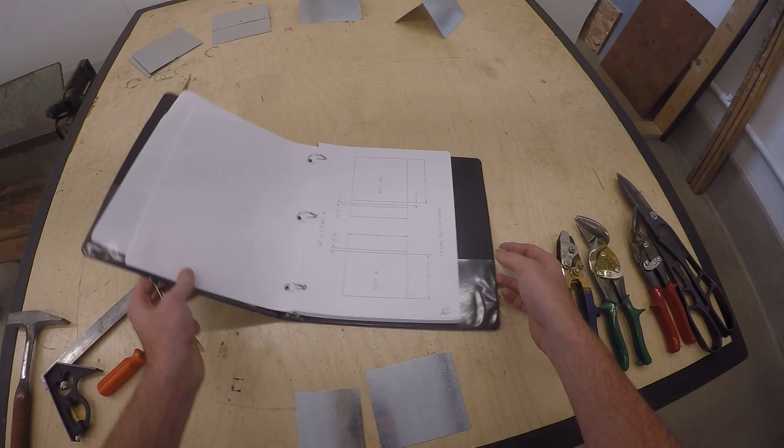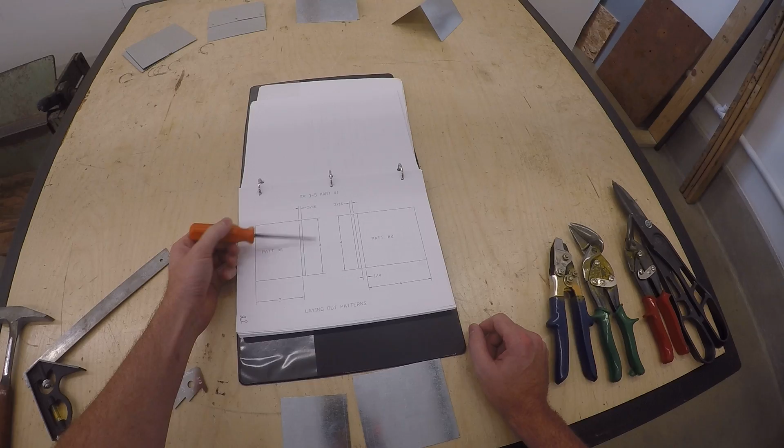So on the next page of the project, what you're going to see is we've got 2 parts given on the plans. We need them to measure 3 3/16 by 4 inches in height for part 1. Part 2 needs to measure 4 plus the quarter plus the 3/16, which is 4 7/16 by 4 inches tall on that particular part.

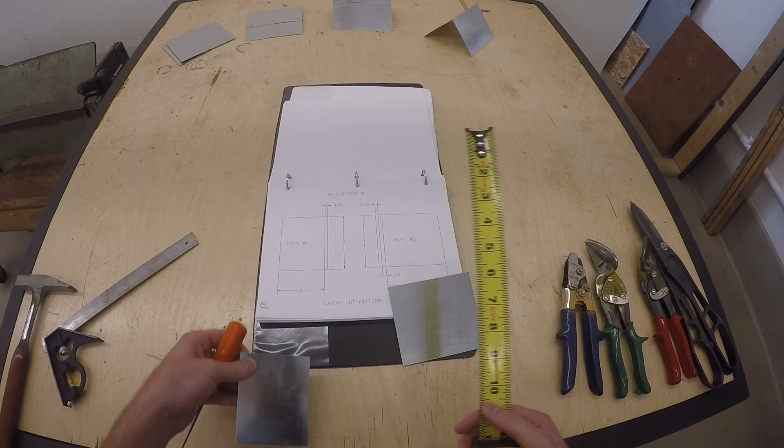So I've cut them already. Right here I've got them, and they should measure just fine - 3 3/16 by 4 inches tall, and then the second part, 4 7/16 by 4 inches tall as well.

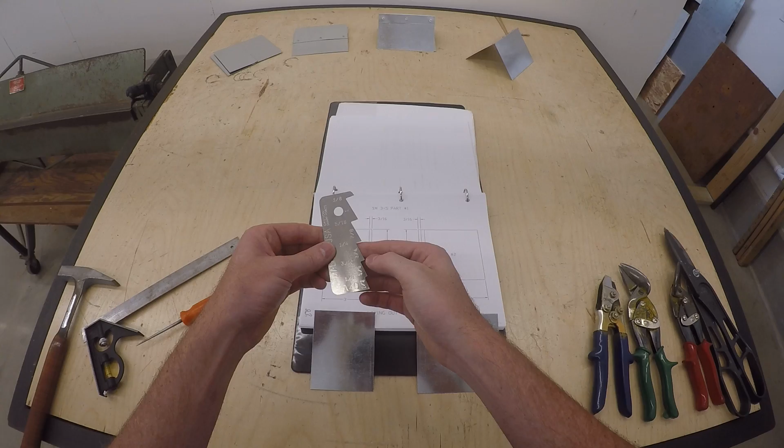So the first thing I did next was lay out this 3/16 mark on the edge of the part. This particular scribe does have a 3/16 marking on that second indentation, so I took it on the edge of the table and scribed that particular mark, and that was all we had to do for this particular piece. The second one we had to do a little more work.

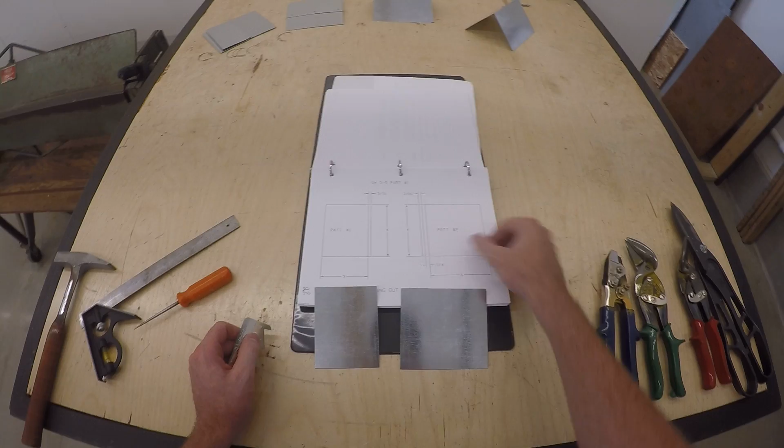Obviously it needed a 3/16 marking first, so same deal with the scribe, the 3/16 setup, and we scribed that. Then we followed it by the quarter inch. That's 3/16 plus the quarter gives us 7/16 inch dimensions, but the scribe doesn't have any of that. So I used the combination square, set it up as 7/16, and marked that right on the edge there utilizing the scribe, or some people will just drag the square down it, but that's up to you.

Now that I have these 2 particular parts made and drawn with my dimension marks on them, let's go on to the next page and look at our forming views here.

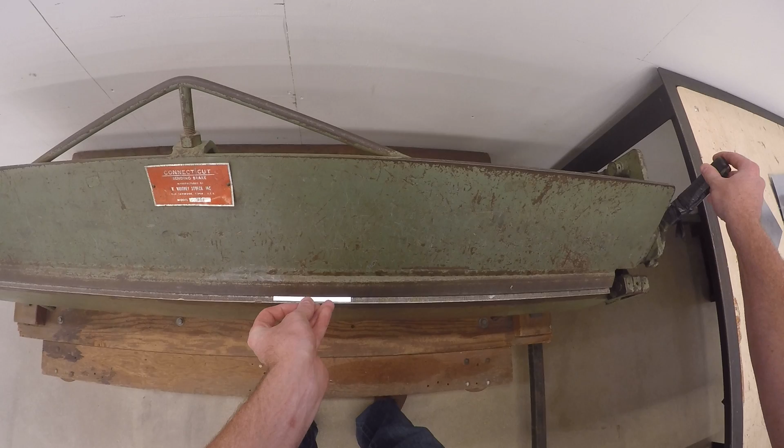So right on my mark there, we'll set the 3/16 up where it belongs. Maybe that's a little bit long yet - taking the time to really make sure everything was lined up just perfectly. You can measure your 3/16 with the tape measure as well, like we've done in the past.

And we're going to pull that up to a 90, just like that. Okay, now that we have that particular part made, we're going to set that aside. That'll be complete. Then we're going to look at part number 2, and take our 3/16 and bend that all the way over.

But we're not going to close that down - we're going to leave a small gap inside of that piece. So in order to make that formation and fabricate that connection, we're again going to set it in there at the 3/16 mark, making sure everything's squared up and true with the edge of the apron there.

Again, you can measure it if you need to - 3/16 on both edges there. And this time, rather than stopping at the 90, we're going to pull that all the way up until it stops against the apron of the brake there.

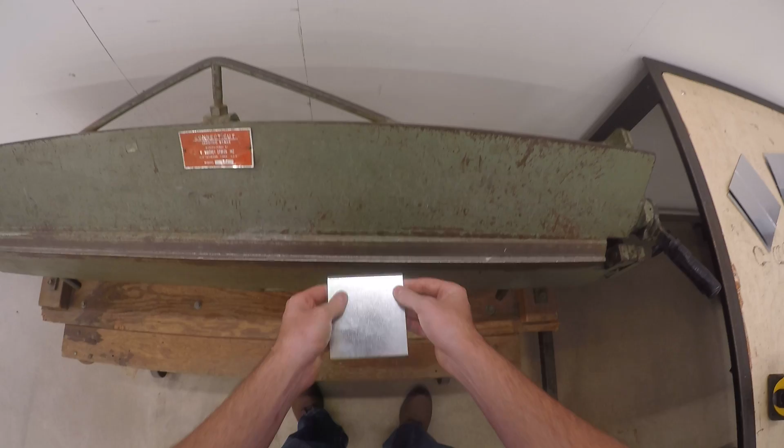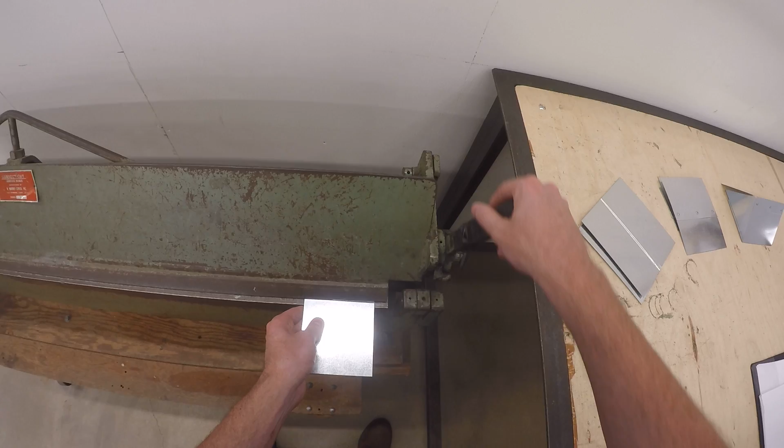At which point we've got a part that looks something like this, but we do need to bring that down just a little bit tighter. So at this point in time, we're going to slip it on the outside edge there. I don't know if you can see the handle - maybe if I move over here on the edge, you'll be able to see the handle in the view there, and see that I don't necessarily close it all the way, but I bring that closer.

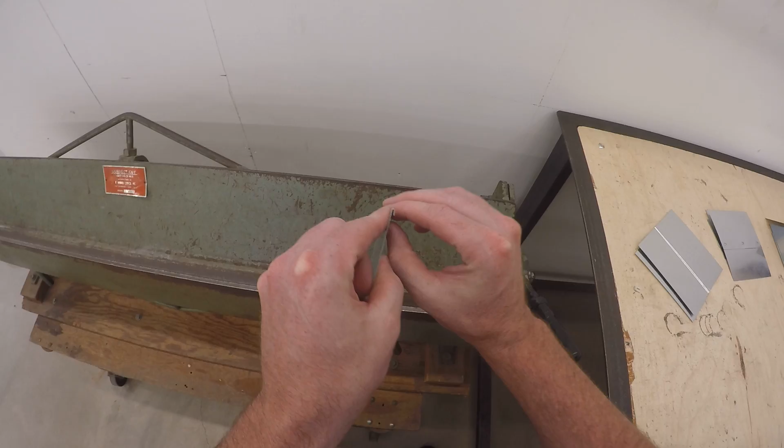This would be all the way closed, and I stopped about here with that apron. Now it's got this little edge there where that other piece of metal will be able to fit into. So looking back at our pattern, you see that it matches with that little lip on that second part.

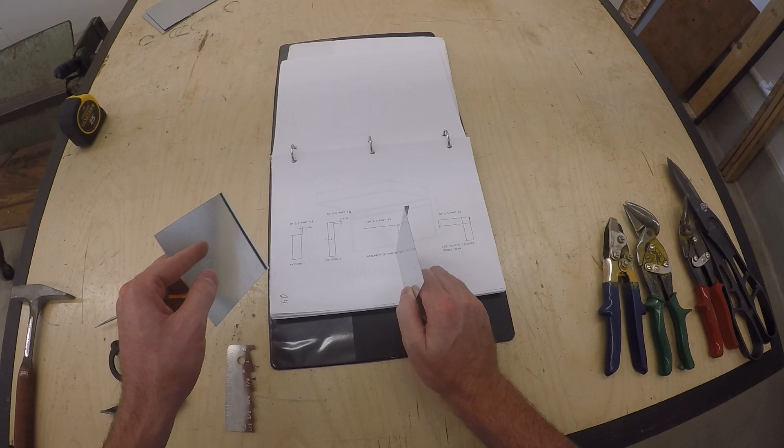So if we go to the third assembly diagram, or the third fabrication view, it's the assembly of part 1 as well as part 2. We're going to take the first part, which is sitting like this over here, and carry that over to the bottom. Then we take the second part like this, turn it, and hook that lip that we previously fabricated.

At this point, the edges of the piece should line up just fine, but they're not tight. So before I move on to the third view, we're going to put the part in there, hold it up against the edge, and tighten that seam up with the apron brake. It can be a little challenging to do.

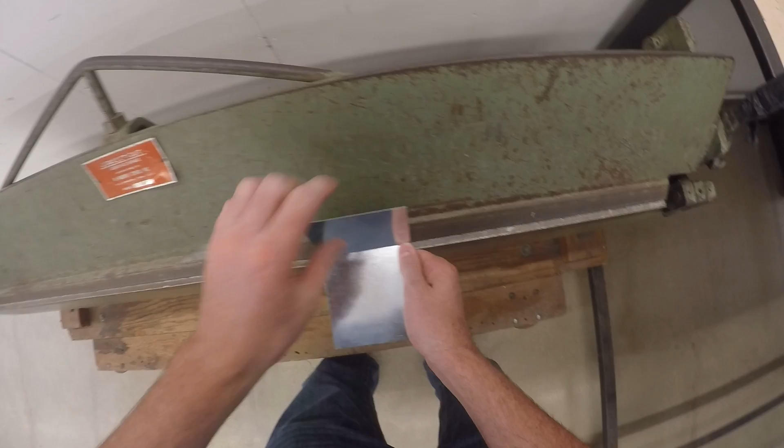We're going to slip it in there, make sure everything is taut. This piece pushed up as far as it possibly can be against the brake, as well as lined up this direction. And we're going to close that seam all the way now using that handle over here.

At this point in time, it is still slightly loose, but it's considerably tighter than it has been in previous attempts. Sometimes you have to go to the center of the apron or different parts of the brake that are tighter and finish them.

Okay, at this point in time, we've got that portion of the part completed. Now what it says to do is take this edge in the brake, and we're going to fold that up till it hits a 90 degree to complete this particular edge, and we should finish with a 3-inch piece here and a 4-inch piece here, and then 4 inches tall. So let's show you how to do that.

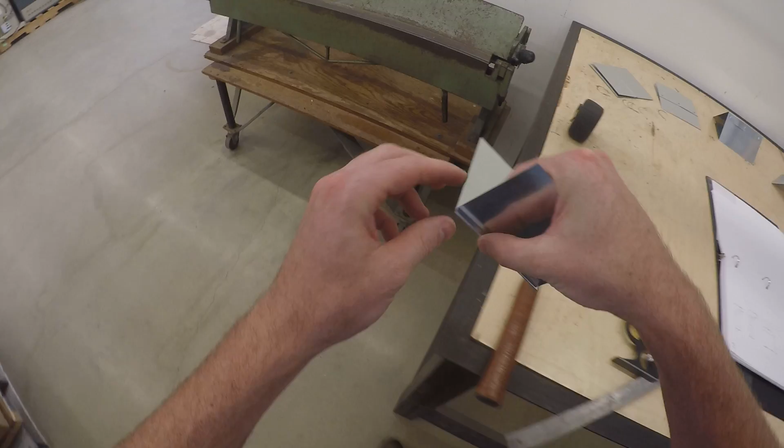This time we're going to stick it in the brake the other direction, and push that all the way in there until it stops at the edge. With a little hand tension back here, making sure your edges are lined up perfectly, we're just going to clamp that, and we should be able to pull that up with a little bit of effort.

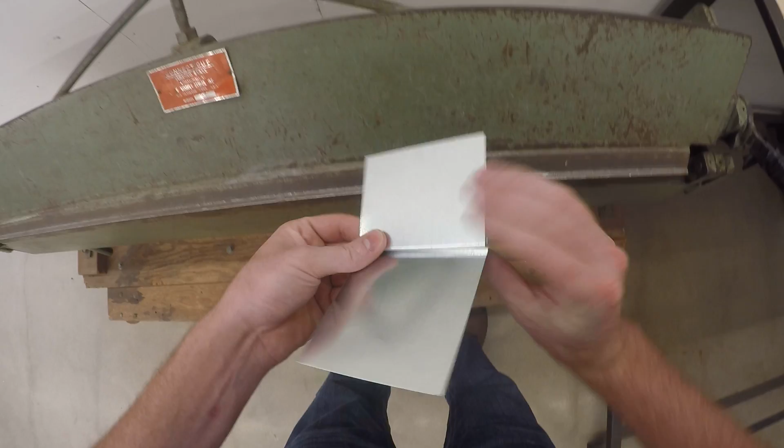And this can be somewhat challenging. You may have to turn it around and do this a couple different ways as well. Sometimes you can hand form it as well. So we're getting closer there.

At which point, if it's past the 45 degree, you can turn the piece around, put it all the way in the brake, and then finish closing that fitting. But it bends it out. At this point, it looks something like this here, but we still need to have our 90 degree.

So we'll slip it back in there on the edge. Make sure everything's lined up again where it belongs, right on the fitting portion. Square it up, pull it down tight, and then just simply pull it up to the 90 degree that we originally had.

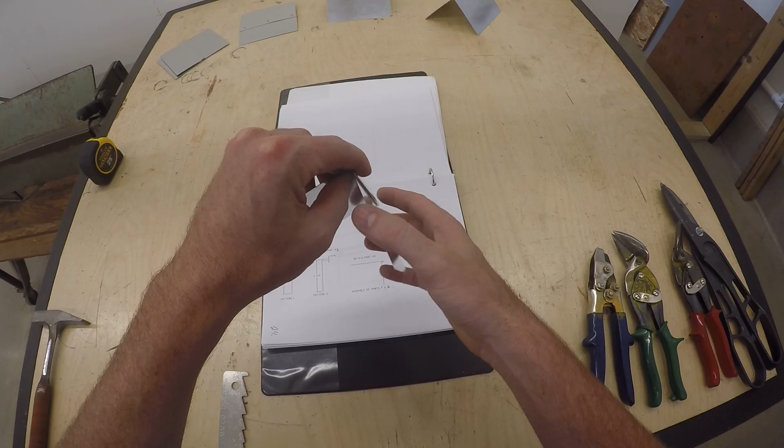And with that, we have our completed corner seam. It's still slightly loose, but that's pretty tight. You can't do too much more than that. It's not like there's a big gap in between the edges or anything of the sort. And if the piece was 4 foot long, it would definitely hold together even better than that.